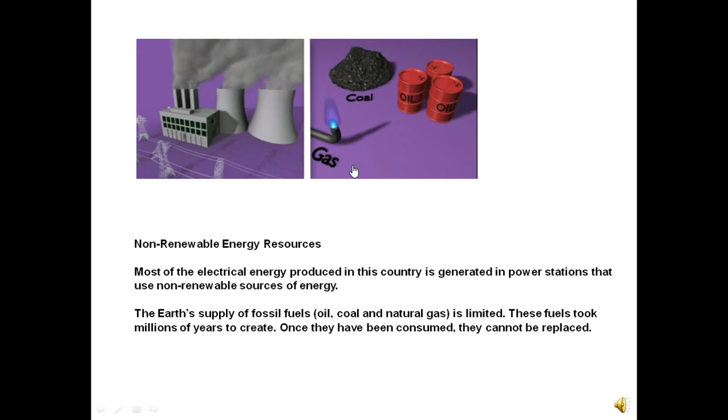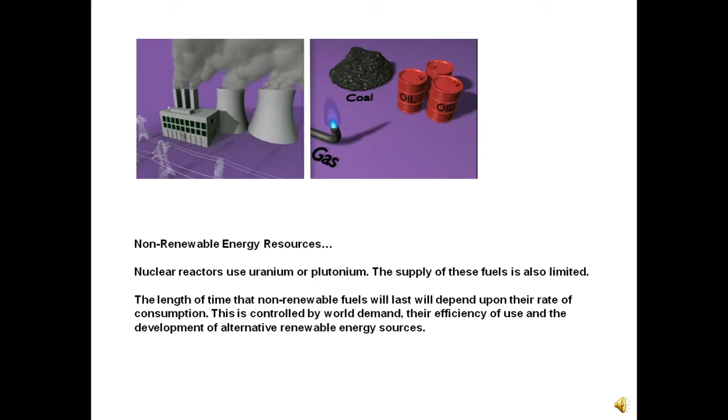So we make electricity using our renewable and non-renewable energy resources, and for the most part what we do is boil water to make steam, to drive turbines, to drive generators. That's the case for coal, oil, natural gas, biomass to an extent, and nuclear. So how long these will last depends on how we use them, really.

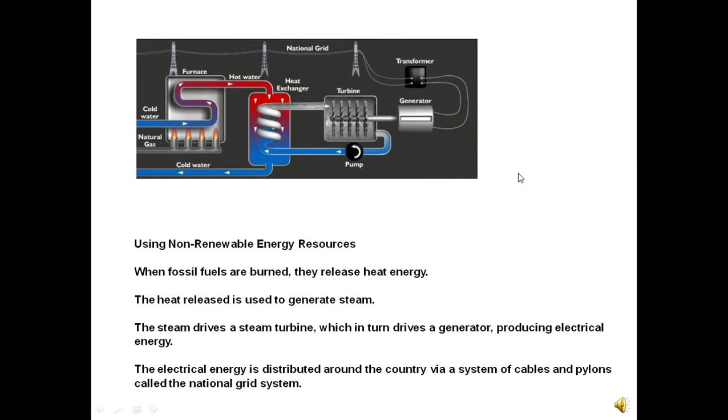Here is a generic power station. So we take our coal, our oil, our natural gas, we burn it, we boil water, we make steam. The steam then drives turbines which connect to generators which make electricity. More of that when we come to it in year 11.

Nuclear is very similar. There's no burning involved. The nuclear fission that occurs naturally is controlled, and the energy that is released from the fission heats a coolant which boils water, which makes steam, which drives turbines. So really everything from here across is the same for your coal, oil, natural gas, nuclear power station. It's how you boil the water that is different.

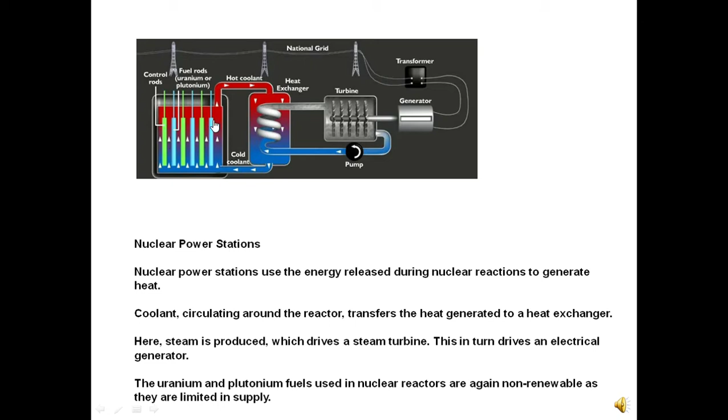One of the big problems, of course, with fossil fuels is that you release carbon dioxide when you burn them. Carbon dioxide then traps the sun's infrared energy to some extent in the atmosphere, and so the Earth warms with all the consequences that entails. You have sulfur dioxide that comes from the burning of oil and coal as well. That then dissolves in the water in the atmosphere, making sulfuric acid and falls as acid rain. So these are serious consequences in the use of fossil fuels, and they're going to run out anyway.

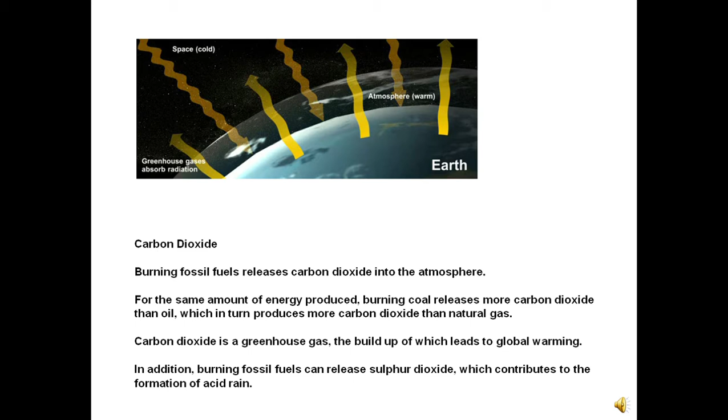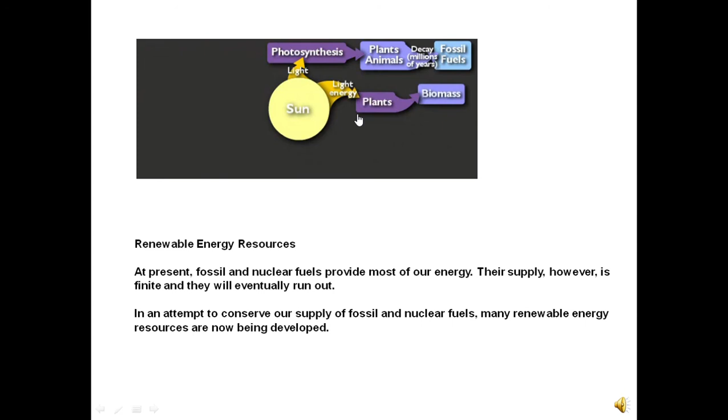Renewable energy resources then, there's lots of these. We have the sun, which then is used by photosynthesis by plants to produce trees. They produce fossil fuels, but also, of course, we can produce biomass. We can cut the trees down and burn them.

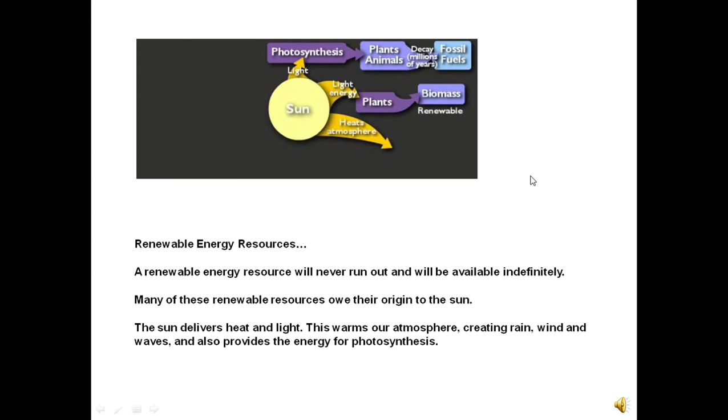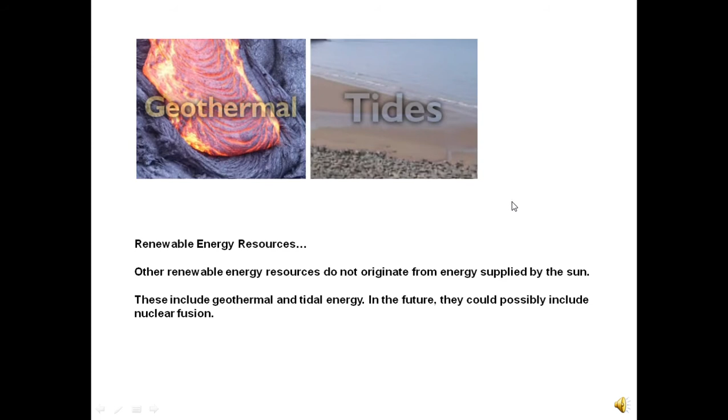We have the wind, of course. We have geothermal. We have tides. Geothermal is a natural thing. Tides, twice a day we have high tides and low tides, and we can use them then to produce electricity. Wind power, well, that's a free energy resource, but it's unreliable in the sense that the wind doesn't always blow, and if it doesn't blow, you don't make any electricity.

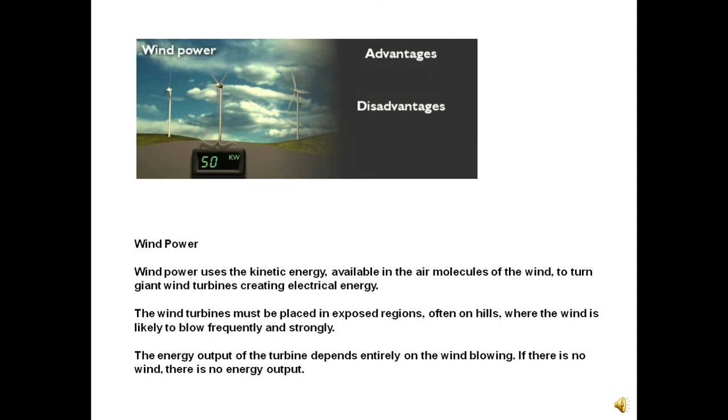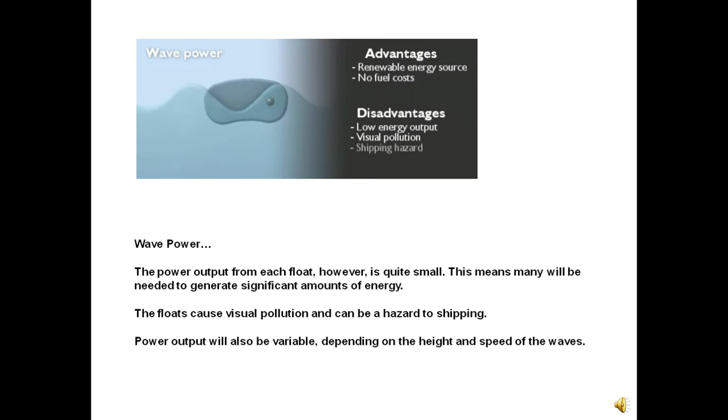Wave power is great, except that we tend to break the things we put into the waves to try to capture the energy, but it's a really promising energy resource, again, completely free. In terms of the energy resource, of course.

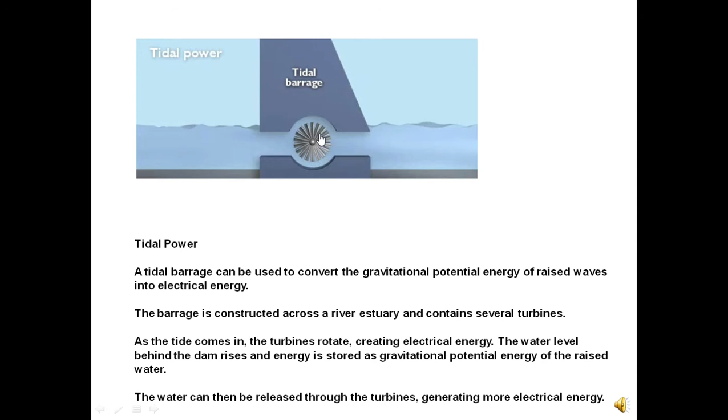Tidal power, well, if you trap the water at high tide and you let the water flow through the turbines at low tide, you can make electricity. And your tides are very predictable, so you know exactly when you're going to get to make your electricity each day, which allows it to be more reliable. But still, you're making electricity for 2 periods a day. You could make it as the water flows into your reservoir, but as the water flows out, you can drive your turbine.

But there are serious consequences for building tidal barrages. You flood land to do it, as you do with hydroelectric power stations to come, which changes the ecosystem significantly. And it's very, very expensive.

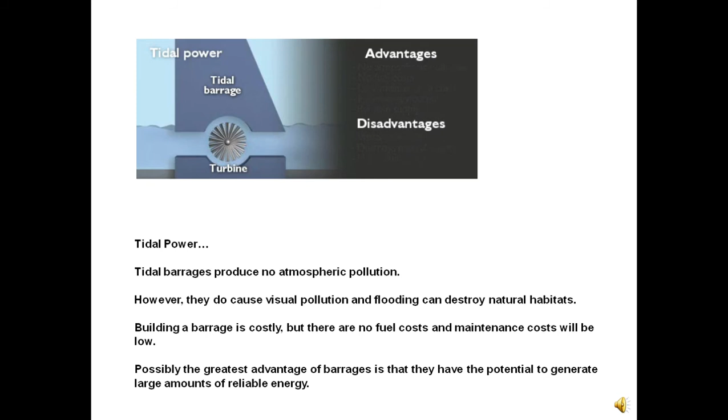Hydroelectric power, you have a dam, so you build a great wall across the mouth of a river. You build your power station into your wall. The water flows out of the dammed reservoir, the upper reservoir, and drives the turbines.

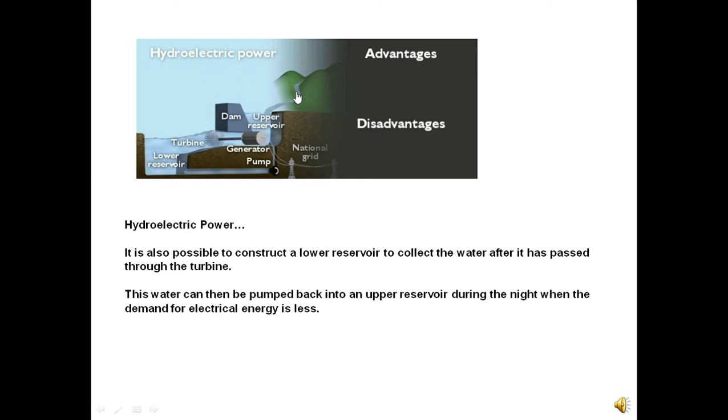And you can also bring that water back up. You can pump the water back up the hill. It's not very efficient, but you can pump the water back up the hill and do it again. So you can store excess electrical energy by using it to pump water up the hill and then get it back by letting the water run down the hill again.

And that's called a pumped storage system. We have one of those in Wales, and they buy excess electricity from the national grid and use it to pump water up to the top of a mountain. And when the national grid needs electricity in a hurry, they can ask this power station to deliver it, and they can produce electricity very, very quickly.

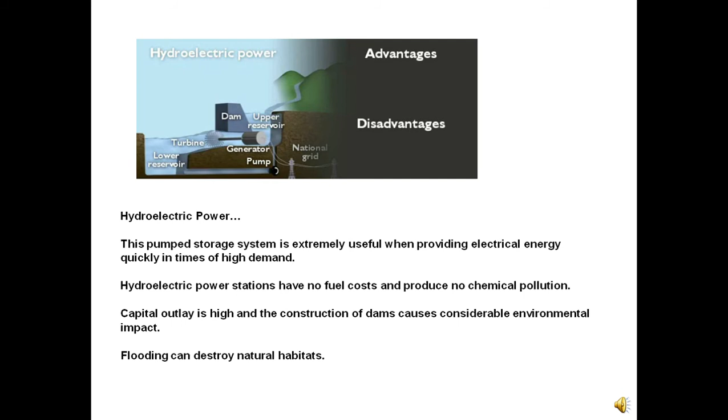Geothermal energy, well, down in the depths of the earth, the nuclear reactions produce a lot of heat. And by pumping cold water into those hot rocks, we can get hot water or steam out, depending how deep we go. We go deep enough, we'll get steam, and the steam can be used to drive turbines. The process of doing this is very expensive if you have to drill for it.

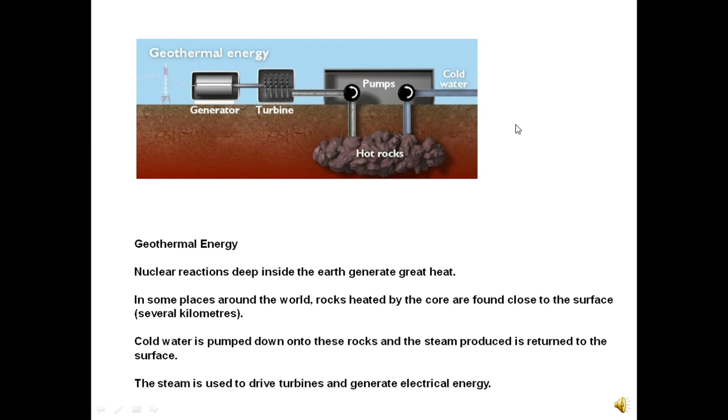Places like Iceland have the hot water coming to the surface, and Iceland produces its electricity and its heating using the water heated by geothermal means. So you don't have to pay for the fuel, it's totally renewable, but it only works in particular places economically.

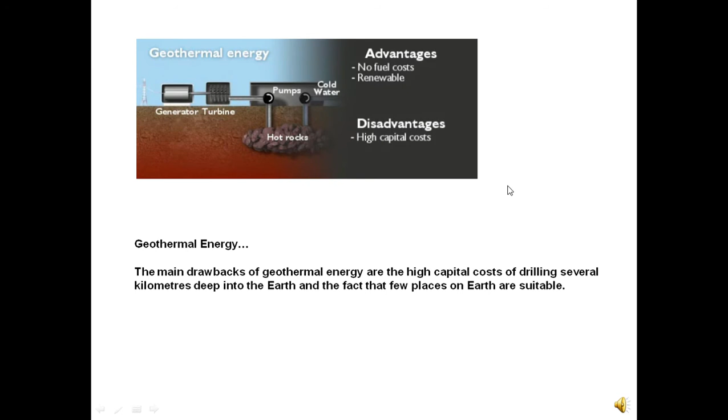Solar energy, of course, you can do this on a small scale on your house, you can do it on a large scale. You trap the solar energy and you can either make hot water or you can make electricity. It's generally small scale in places like the UK, and it is of course unreliable because you don't know when it's going to be sunny.

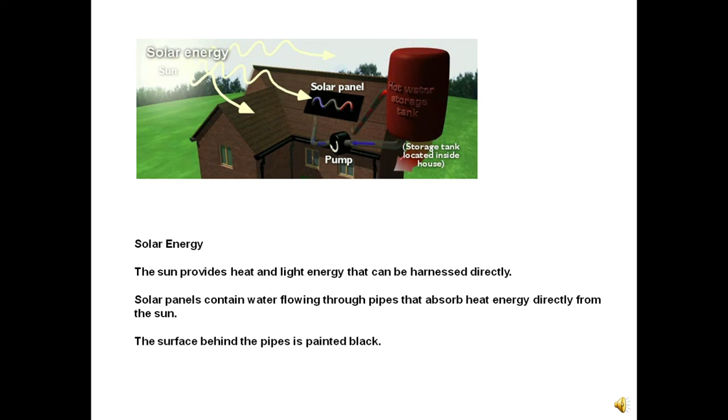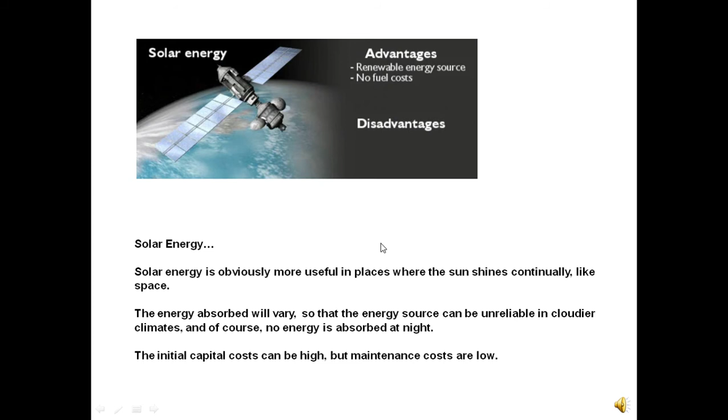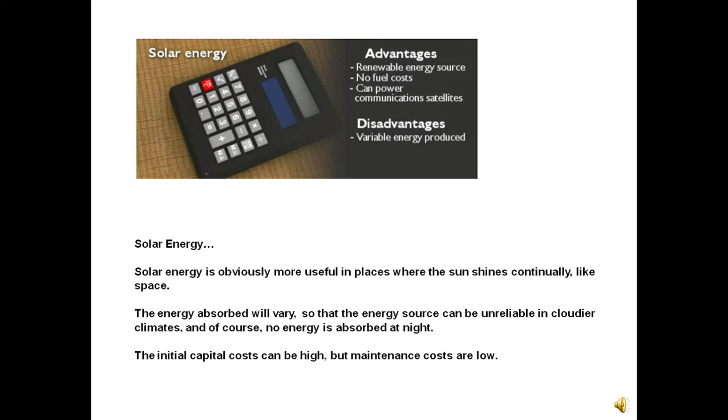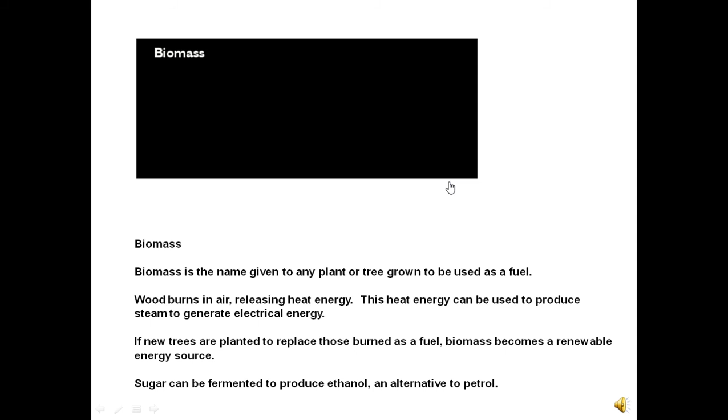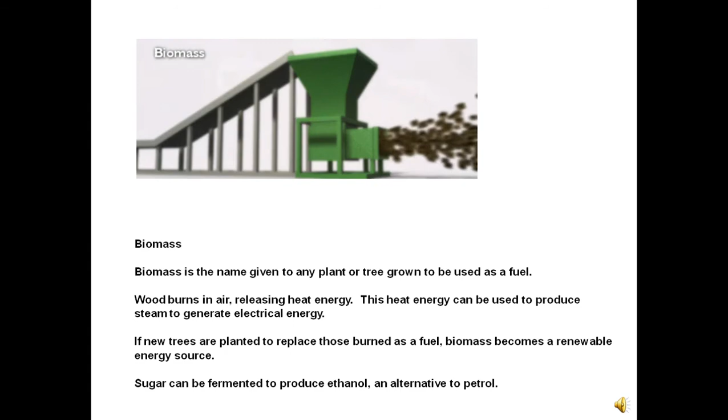Biomass, well, as I mentioned, that could be trees. It's any kind of organic matter. So it could be animal waste being used to produce methane. It could be trees being burnt to produce heat. You obviously burn the methane from the rotting waste or the animal waste and use that to drive turbines. You can ferment sugar to make ethanol and then use the ethanol as a fuel. Alcohol burns very well. So

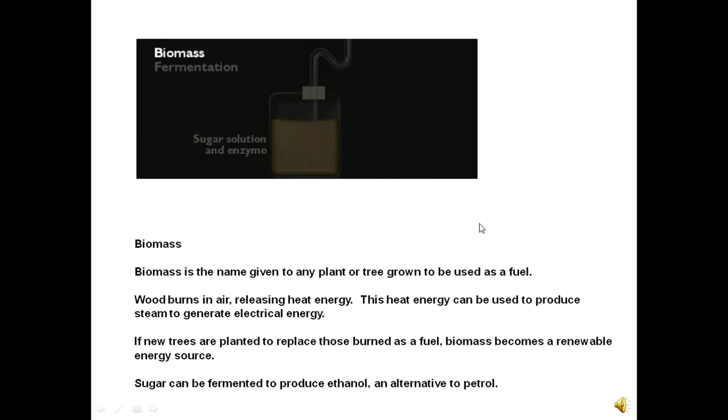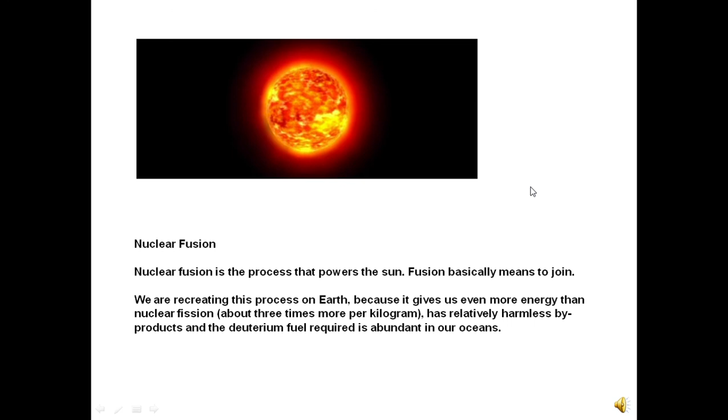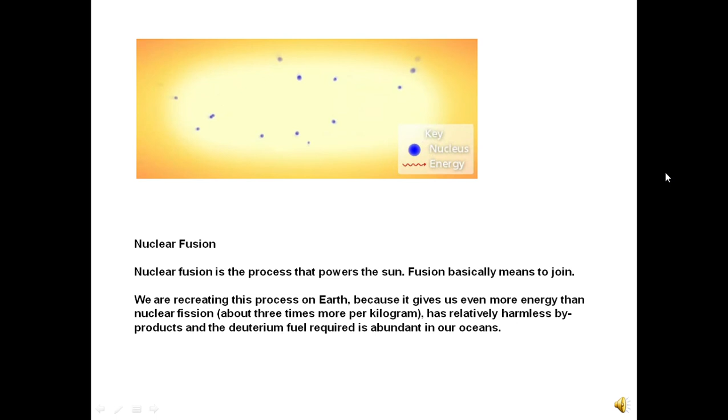that's biomass, really. Nuclear fusion, well, nuclear fusion is how stars produce their energy, and if we could do that on Earth, that would be great because it gives us a lot more energy per kilogram, a higher energy density, and we don't have the long-lived nuclear waste. It's short-lived, there's not very much of it, so it's much, much safer. Nuclear fusion, if it all goes horribly wrong, just stops, whereas nuclear fission will get out of hand and explode. So nuclear fusion looks great.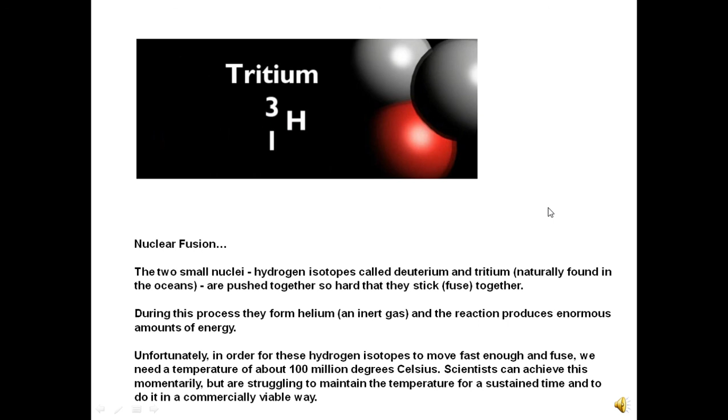You take two isotopes of hydrogen and you smash them together so fast that the nuclei fuse and you make helium and lots of energy. The problem is to get them to smash together fast enough, you need to make it very, very hot, 100 million degrees centigrade. And whilst we can do that, it's not really commercially viable. And keeping it going is a bit of a problem.

We have ITER in the south of France. This is a hugely expensive project to do nuclear fusion on a commercial scale. That is just beginning as I speak, really. And they're expecting it to be operational by 2027. 22 billion US dollars is a cost estimate for that. So we are moving towards nuclear fusion. We're still a long way off it. It will be very expensive, but if we make it work, it will be the solution to the world's electrical needs.